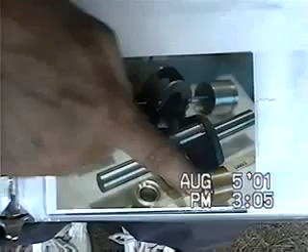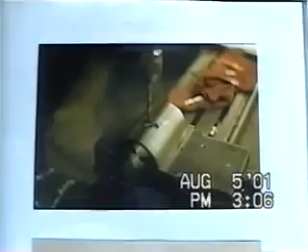Diameters there is to break up the RPM so that you don't gall any of the surfaces. Now that's an intriguing idea. This is machining some of the sleeve work, putting the holes in the sleeve at the proper place, the proper depth, to line up with the porting in the jug.

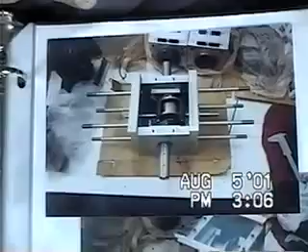This is one of the first assemblies where I was bringing the engine together, the complete engine for the first time, to see all the parts match. How'd you do your drawings? The drawings were done by a friend of mine who took the dimensions and put them in a computer.

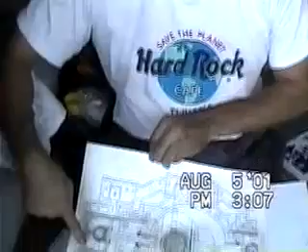And that means that there's a 3 1/4 inch diameter piston and a 2 1/8 inch stroke on this particular model. It should have been a 2 1/4 inch stroke, but it's only a 2 1/8 inch stroke. I misread some of the numbers. A little less power.

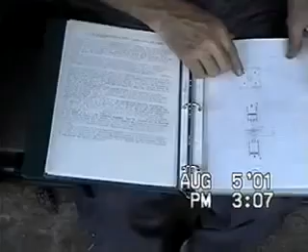This is some of the machine work in the computer that the girl had done for me. She was very nice in putting all the numbers in there. And this is just the basic one line. If you go into it in the program and you want to read it out, it'll put all the dimensions on there, every single one of them.

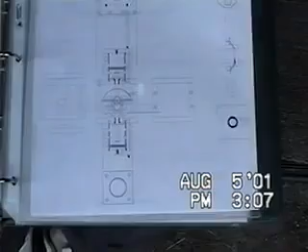Sounds like AutoCAD. I believe it's a more professional model from AutoCAD. It's a true three-dimensional, and right now it's a two-dimensional rendering. Okay, so more of the assembly.

Is there something about a Bourke engine that attracts flies? No, it's just probably me.

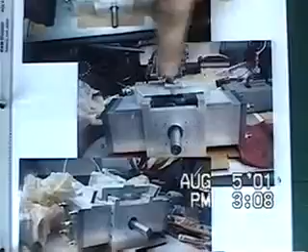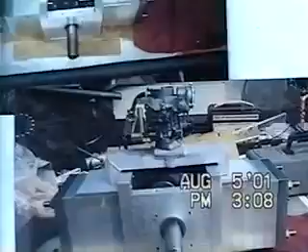This is the intake manifold before it was finished off. Mounting the carburetor. The choice of a carburetor was for a Solex, the similar one that ran the Volkswagen engine, of approximately twice the cubic inch of this one. Therefore, I thought since it was feeding twice as much, only half the time, it would be equal to it.

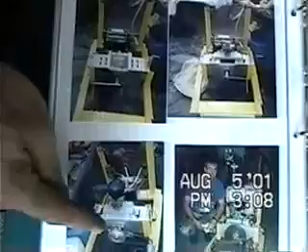In the starting cart the first time, hand cranked, wouldn't work. Motorcycle starter, not enough power. And finally we put a Volkswagen flywheel and starter assembly outside, and that worked rather well.

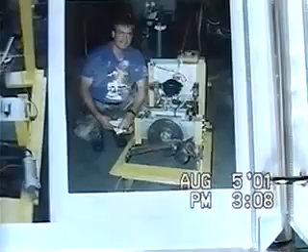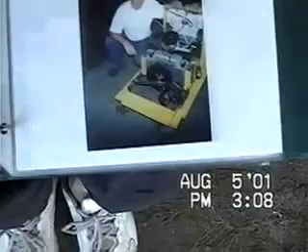Except I didn't like the open end of the flywheel hanging out there where people could get their fingers into it and all. And later on I wanted to put it on a Volkswagen engine anyway, so I decided to cut a bell housing off, and that's in the present configuration.

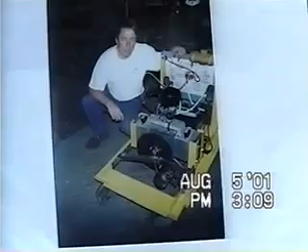Okay, now your colleague's name again? Mac Burns. B-Y or B-U? B-U-R-N-S. He's a very nice gentleman that has been very generous with his time and machinery and skill.

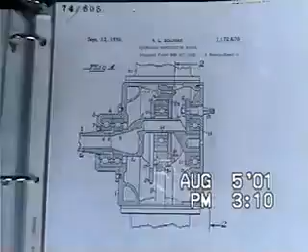Shaft. And the particular way, it doesn't quite show it in here, but the particular way he put the counterweights onto the crank was very unique. The crank itself was machined with round curves going up to the throw so that you could slide the triple slipper bearing up and over and the Scotch yoke cage around and bolt together. And then you put the counterweights on with a bolt going through the counterweight to hold it in place.

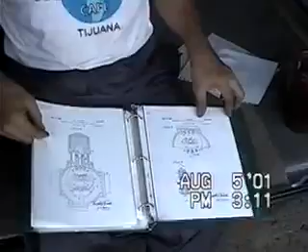And I didn't know this until after I had made mine. Well, see the next one. And this one, like I said, has got the old roller bearings in it, and he invented the new slipper bearings, so I went with slipper bearings on mine because I could not find a roller bearing that would go with the RPMs and the horsepower and the size that I wanted for this engine.

Okay, now the slipper bearings, each layer is made of a different material? They're alternate layers.